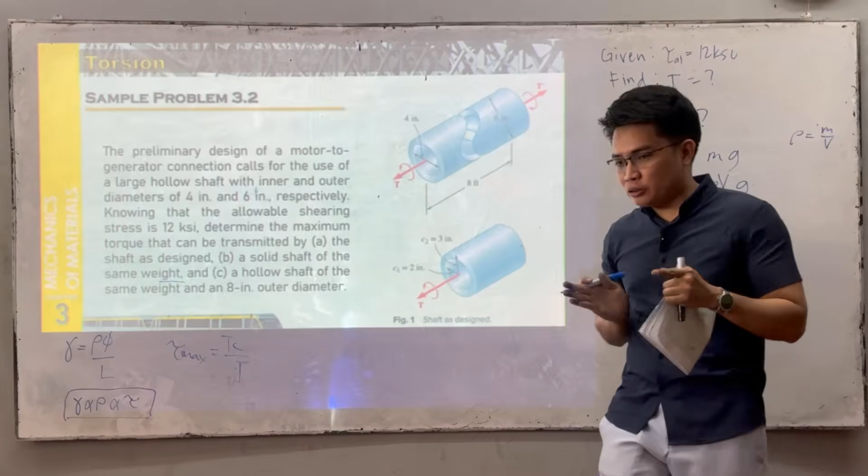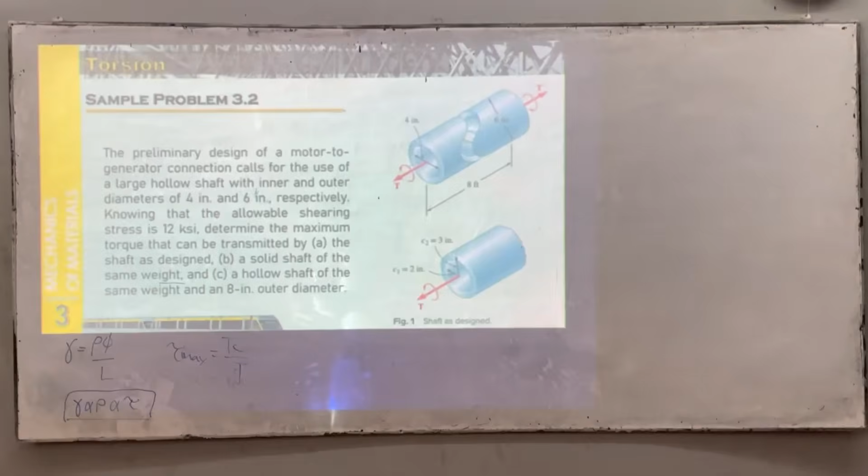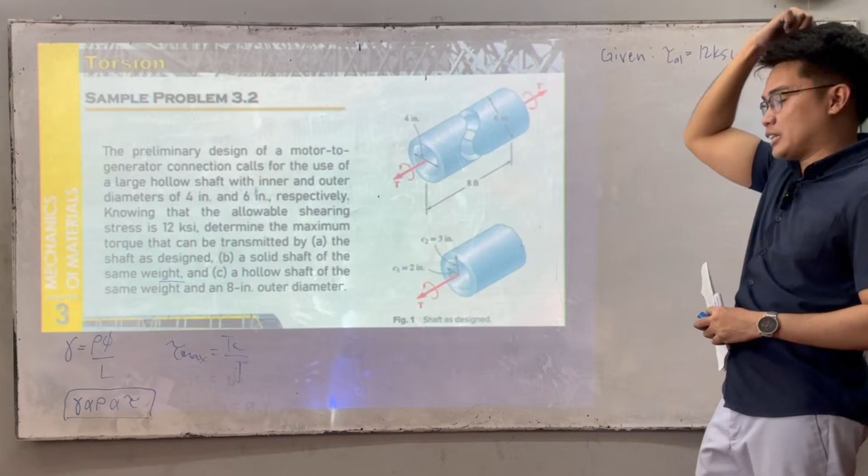Let's have this one. The preliminary design of the motor-to-generator connection calls for the use of a large hollow shaft with inner and outer diameter given: outer diameter is 6 inches, inner diameter is 4 inches. Knowing that the allowable shearing stress is given as 12 ksi, determine the maximum torque that can be transmitted. So we're looking for the torque.

We need to find the torque, but the conditions vary. In the first condition, we're looking for the torque as designed — given the shape, the inner and outer diameter, and the length, find the torque.

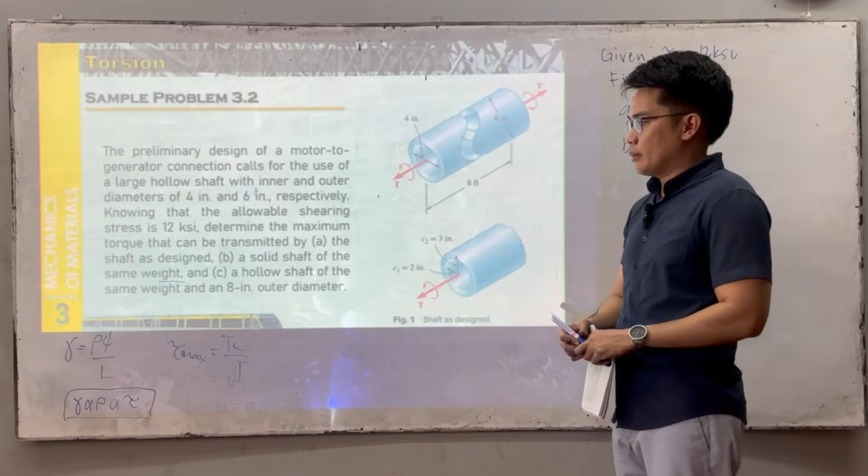For letter B, what are we looking for? The solid shaft of the same weight. So now, keeping the same length, but making it solid — find the torque of the solid shaft, with the same weight. So the amount of material used here should be the same amount of material used in the solid shaft. What is the torque?

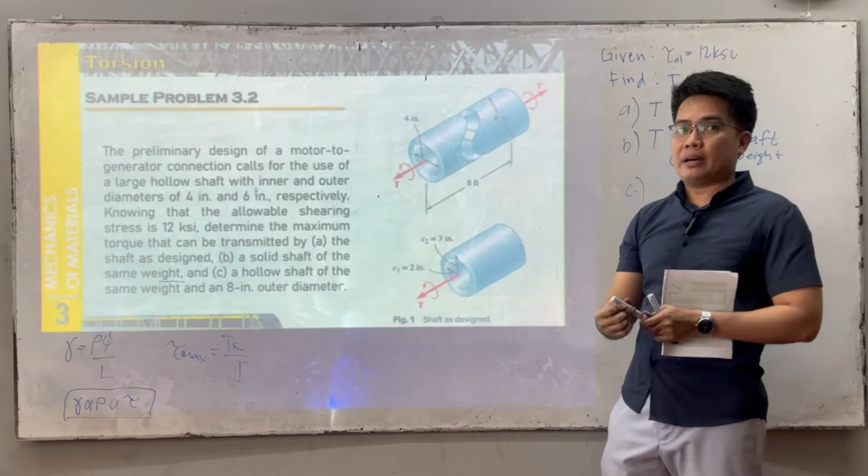Tau equals TC over J. Our J here is hollow, right? So what's our tau? 12 ksi. So 12 times 10 to the 3 equals... what's our C? The outer radius.

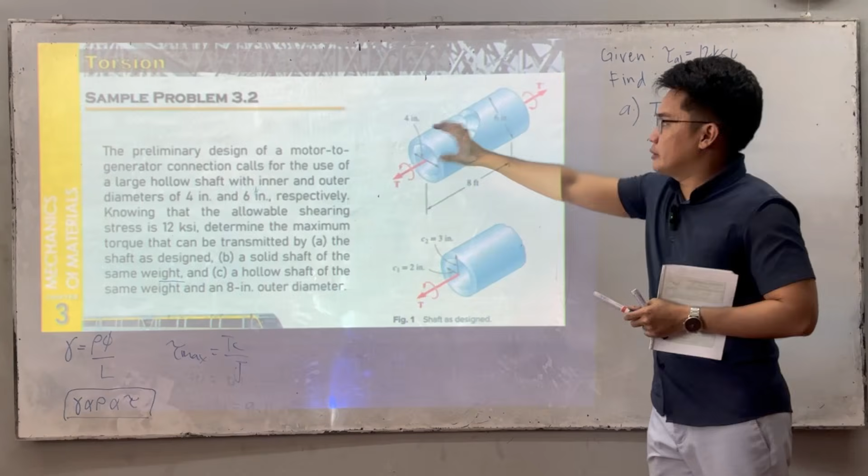So we reduce: times 3, divided by pi over 2 times (3 to the 4th minus 2 to the 4th). So we can get the torque here. The torque is 408,407. This is in pound-inch. If you want it in kilopounds, just move the decimal point. So it becomes ksi, kilopounds-inch.

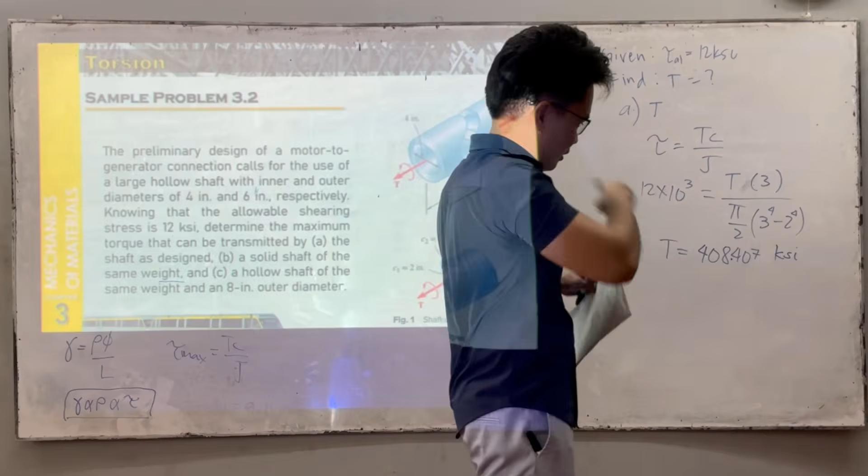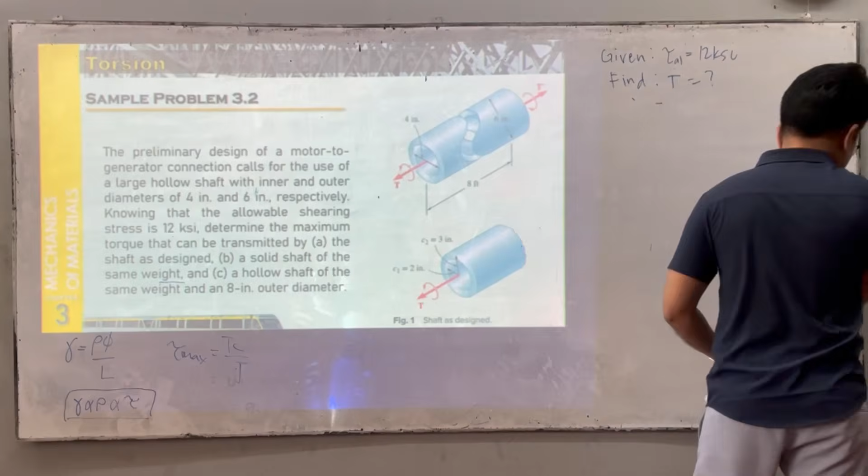Okay, very easy, letter A. How about letter B? Let me erase this. Let's do B. What's the condition in B? It should have the same weight. We'll look for the torque.

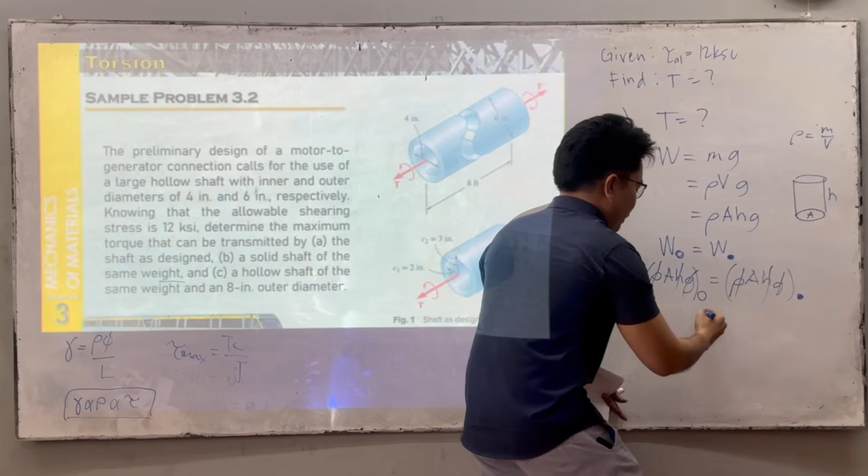Material is related to density. The same thing applies here, they cancel out. So for the weight to be the same, the area of the hollow should equal the area of the solid. Now, what is the area of the hollow? Area of hollow is the area of the bigger circle minus the area of the smaller circle.

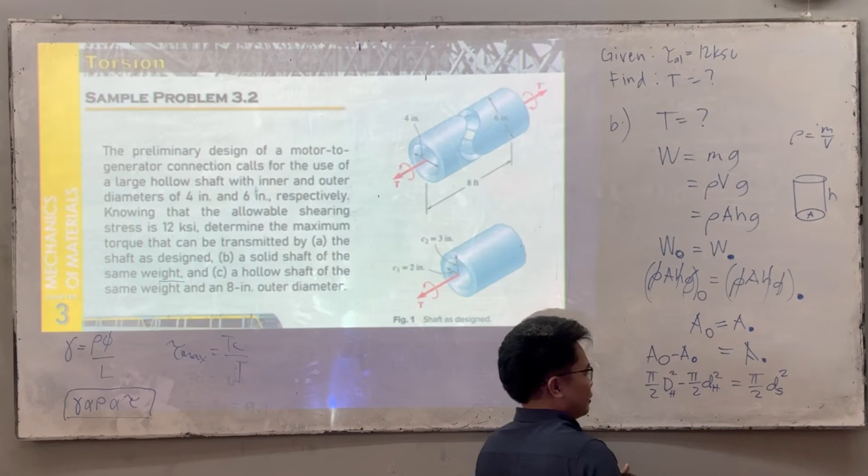So let's say this is equal to, let's call this hollow. Now how about this one? Pi over 4 times diameter squared, to the power of 2 - this is solid. So let's cancel this, cancel this, cancel this. We get that in order for the weight to be the same, changing into solid, the condition should be D squared minus D squared, smaller diameter is equal, pi over 4, the area equation.

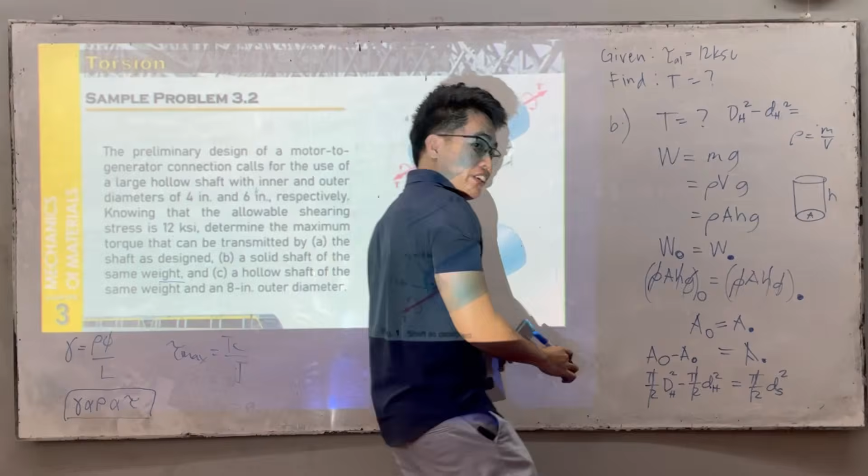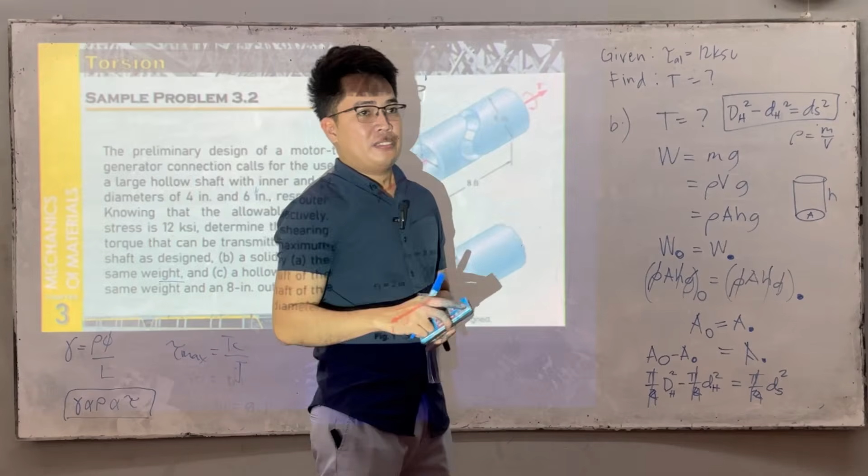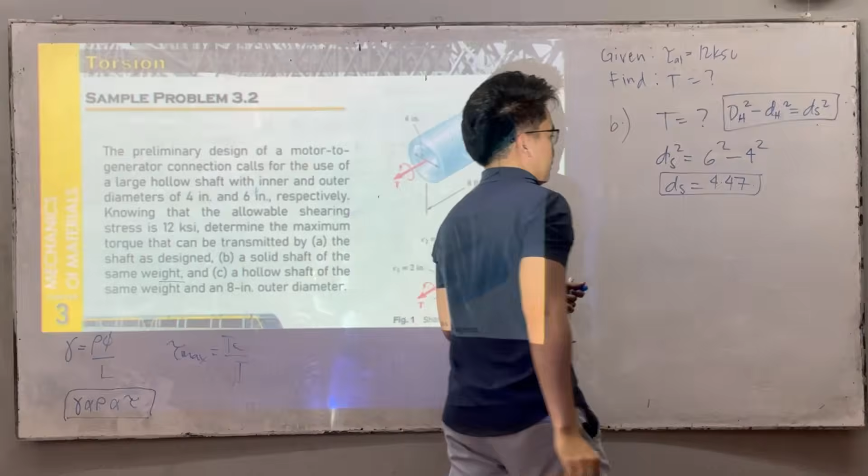Let's solve for ds first. What is ds for the solid? We have ds squared as 6 squared minus 4 squared. So what is our ds? 4.47 inches.

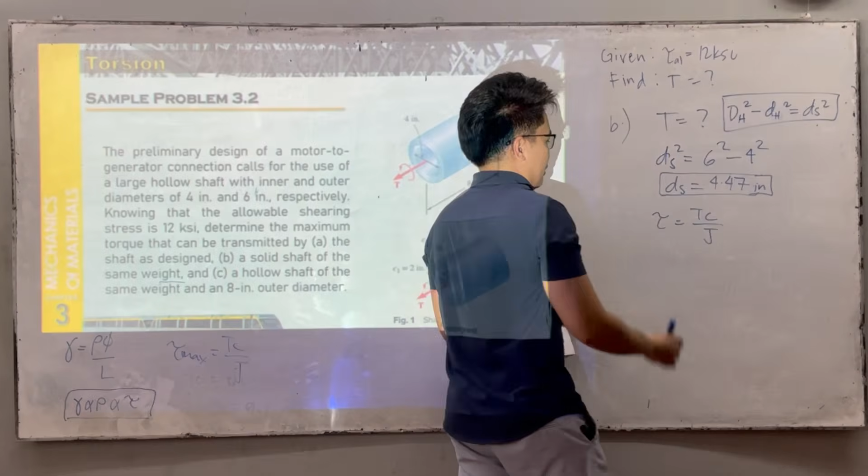Let's apply the formula, TC over J. This is solid, so what is tau? 12 times 10 to the 3 is equal to, what is the torque? That's what we're solving for. What about C? That is 4.47 divided by 2, since it's the diameter. We have pi over 2 times 4.47 divided by 2 to the 4th power. So we can get our torque here.

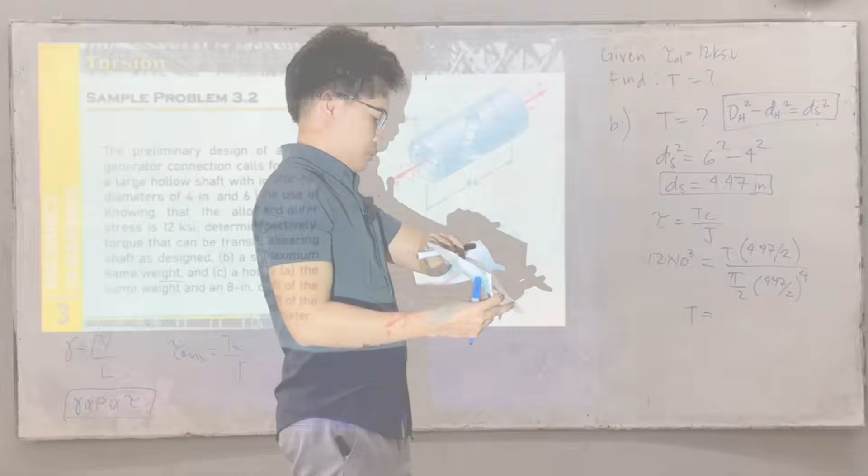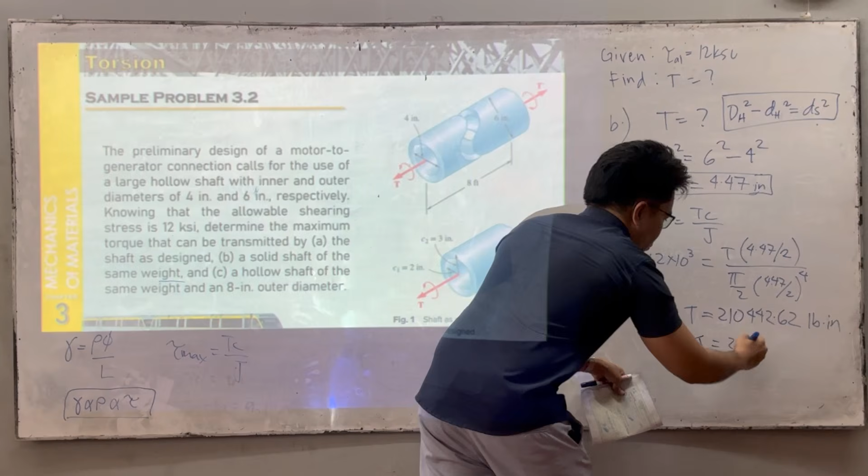Let's check if it's correct. We have 210... 442.62, so this is in pound-inch, since we're using basic units throughout. Or that is, torque is 210.44.

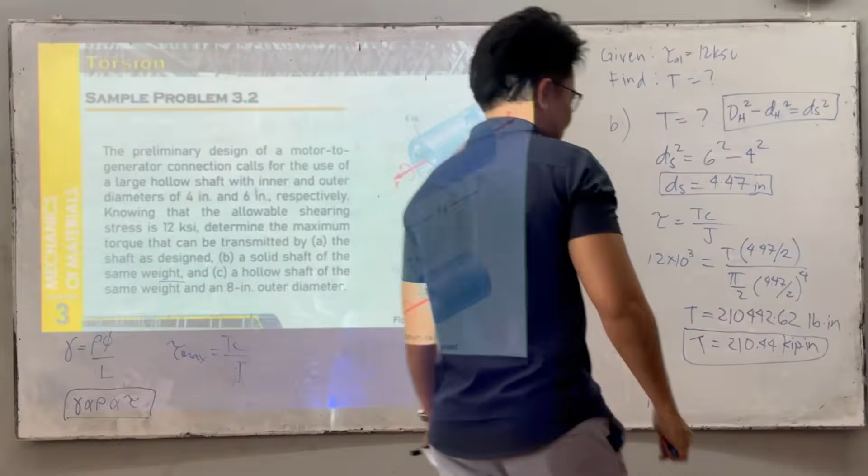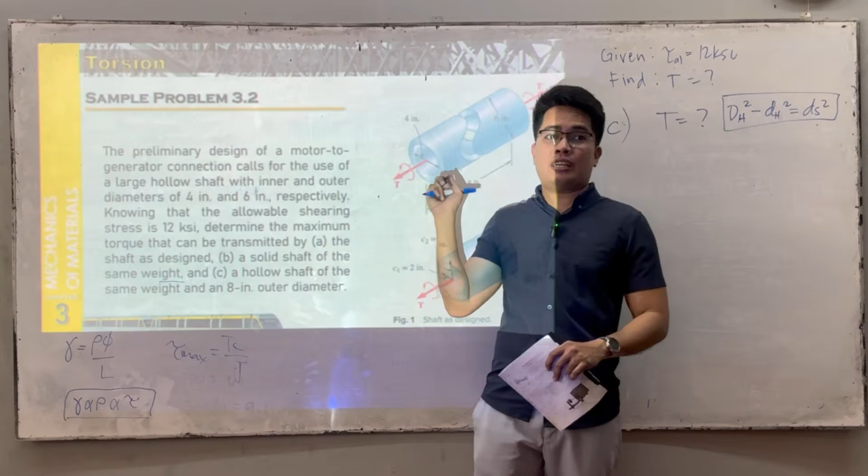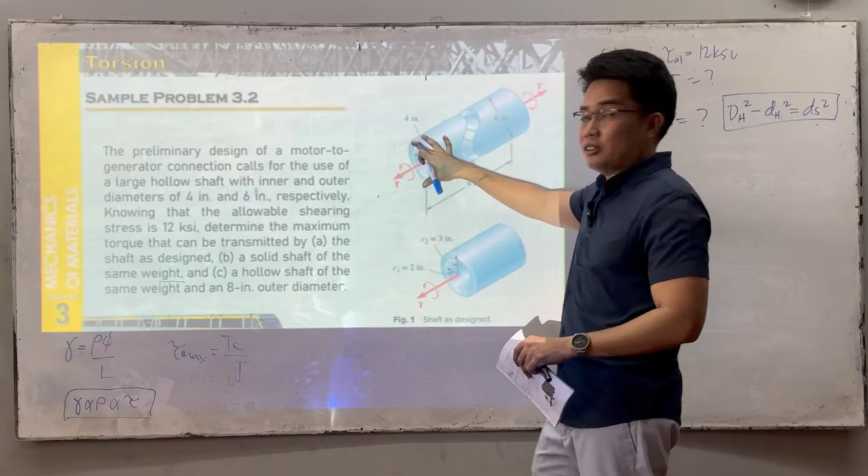Okay, it's hollow, but we change the outer diameter. So, we can use this again. We have D - let's call this case A. So we'll name it DA, okay. Then on the right side, let's call it C, since the condition is for C.

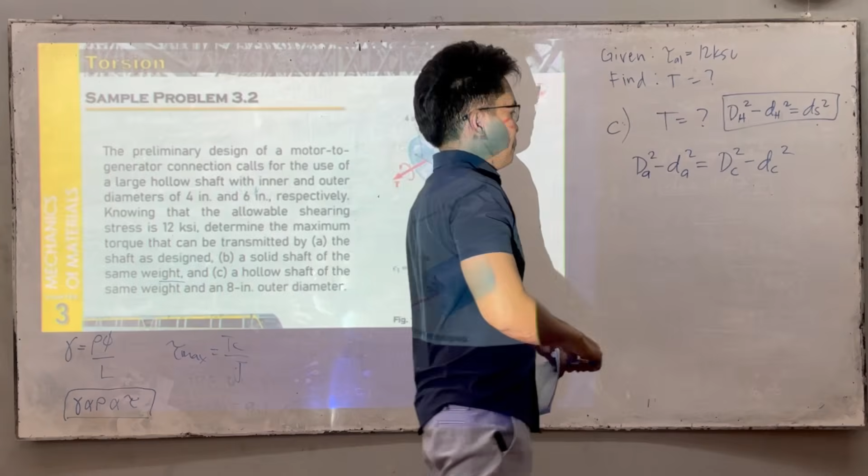So, DA squared minus DA squared equals hollow, this is DC squared minus DC squared. Let's substitute: we have 6 squared minus 4 squared equals, what is our C condition? 8. So 8 squared minus DC squared. We get DC equal to 6.63. If we divide by 2, we get RC, 3.32.

So, how about our DC? Let's call it RC, the big radius, the outer radius. We have 8, so it becomes 4. Okay, let's substitute into the formula.

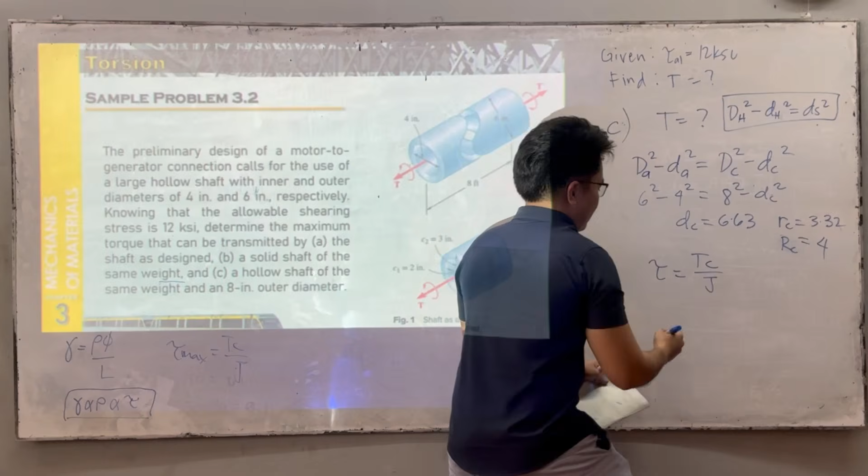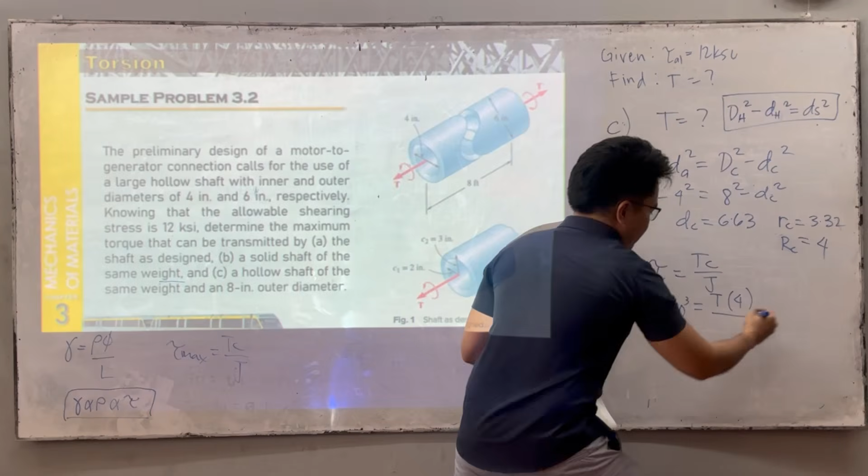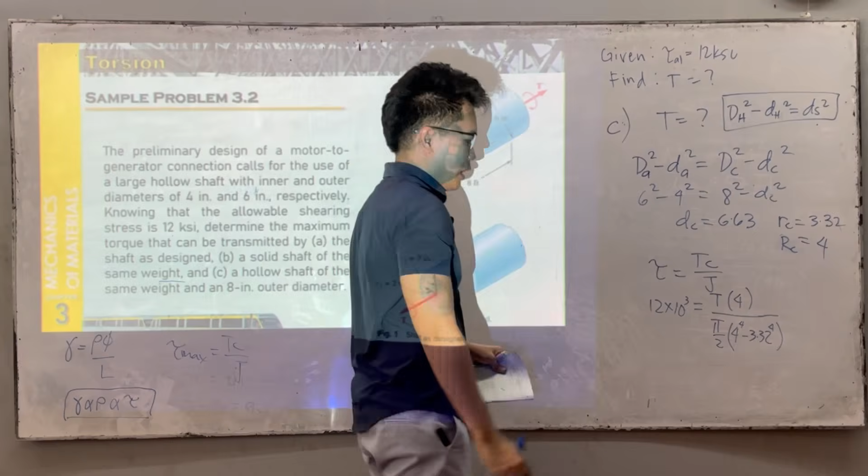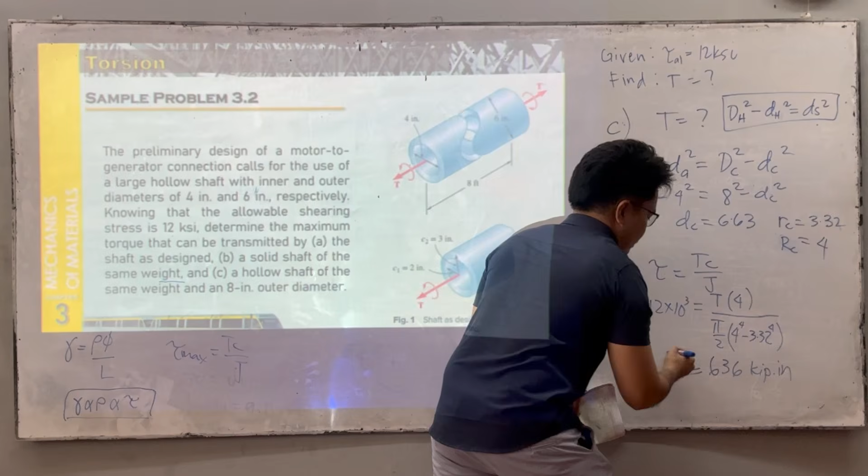Shearing stress is equal to torque times C over J. So our shearing stress, 12 times 10 to the 3, equals torque times C, the outer radius which is 4, divided by J which is pi over 2 times 4 to the 4th minus 3.32 to the 4th. So we get our torque, which is 636 kip-inch. The end.